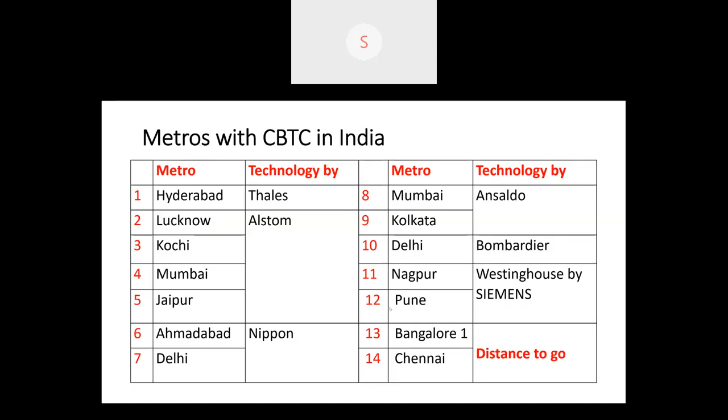What is the difference between mainline signaling and metro signaling as far as operations are concerned? Average speed on mainline is about 50 to 75 kilometers. Metro is 30 to 35. Headway is 5 to 7 minutes in the busiest routes on the main line, and in the metro it is in seconds, maybe a minute, 1.5 minutes. Interstation distances are 6 to 10 kilometers, and here it is hardly a kilometer. Braking distances are very less, about 200 to 250 meters.

Station yard layouts: for the passengers' sake, there are no yards practically, very few lines, only 2 lines normally. Only in the depots, yards are there. Signal clearance may take some time because it is done manually on main line, whereas it is a question of seconds. Then stopping time at stations is 2 to 5 minutes on main line, whereas it is in seconds in metros.

Distance between 2 trains: in absolute block system we are having about 6 to 10 kilometers. Auto signaling, it is hardly a kilometer. Whereas they can be as less as 25 to 30 meters in metros. So what made it possible in metro, the standard talks about?

We can say train controlling has 2 types. One is external to train, the other one is internal to train. External to train, we are all aware. When we start from the beginning, first the time interval system was there, and then it became space interval. Time interval was not safe because if the train ahead brakes, there can be collision. That is why we have gone for the space interval, where human agencies were responsible in the beginning for avoiding the collisions. This is how the signaling solutions we are providing.

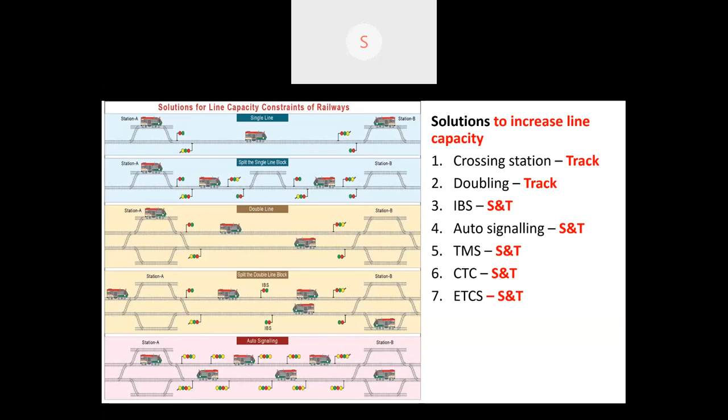This is the conventional train controlling, where a traffic controller on telephone advises the station masters which train has to be preceded or where crossing has to be arranged. This is the indirect way of controlling the train. Then came the TMS. Basically, TMS is a tool for the traffic controller. It is a real-time display of trains on a mimic diagram with train numbers displayed, so that the controller has an overall view of the situation.

The background work involved is train tracking, which requires train number entry also. If it is done, the train number is displayed. Then train charting, automatic charting, where the delayed or on-time trains are also shown. Then integration with crew, rake management and loco management software makes optimization of the resources possible.

Sir, 1 minute, sir. Actually, the slides are coming a little bit slow. So you can give a slight pause after every slide, sir. Oh. Now TMS is available with you? TMS, train management system. Yes, sir, it's visible. It's fine, working fine, sir. Okay. Next one you got? Yes, sir.

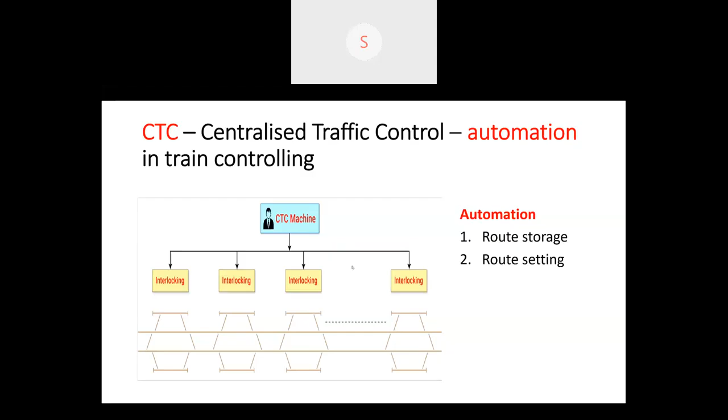That is, interlockings are controlled from the central place by the CTC machine by a central person. If we look at how the signaling systems have evolved, we can say first signals started detecting the point. So the signal engineer is exposed to the track. He is supposed to have knowledge of points and crossings. Then came the train detection with the track circuiting. So the insulation properties of the track, sleepers, that knowledge is required.

Then came the repetition of the signal aspect into the cab. So here the human element is now involved, how the driver looks at it, how he responds to it in the cab. We had a number of cases where they were even damaged in the initial stages because they thought it is not an aid, but it is snooping on their activities. Then we have controlling of brakes and then controlling of the propulsion. Propulsion means actually deceleration and acceleration, stopping and speeding of the trains. Now we are supposed to know the loco characteristics also as signal engineers.

So the same thing we can show in a different way. We can see who is our consumer. The consumer of the signal is the driver in the beginning. So track circuit, point, LC gates form a route and then a movement authority is generated and shown in the form of signal and the train driver used to consume it. Now the movement authority is consumed by the train directly. So the knowledge of the train, loco, propulsion as well as braking is a very, very important thing for signal engineers now.

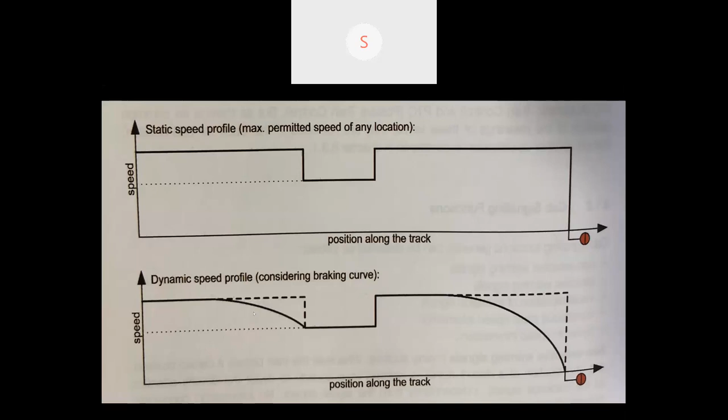Let us have a look at the speed profiles of the trains, how they are shown. In the top graph, we can see it is called the static speed profile. A speed restriction is there. And of course, as the train comes to the signal which is showing red, it is supposed to come to stop, zero. Y-axis is the speed, x-axis is the distance. Actually, here it is shown as if the train speed has to reduce from x to x minus y, as if it would happen in a sudden way. There is a braking characteristic. This is called dynamic speed profile. So the dynamic speed profile is the thing which is really important for us.

Train speed is controlled in two ways actually, or two considerations are there. It is based on severity of speed deviation. That is, at a particular location, how much more is the speed than the permitted one. That is the severity. The other one is based on the distance, how to reduce the speeds in steps. These two.

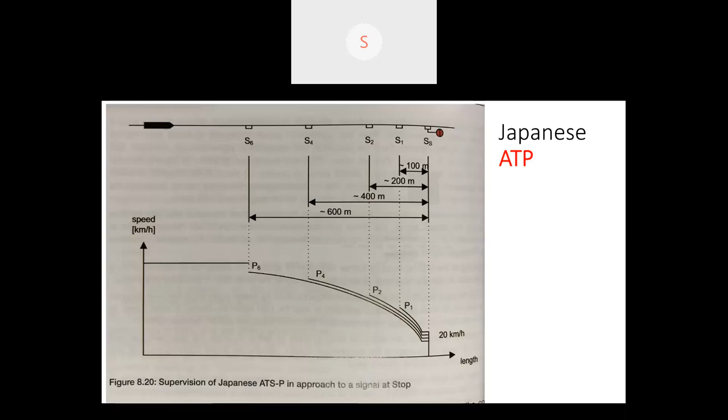So ERTMS, that is European Rail Traffic Management System. This is the one becoming the world standard and we are also adopting it in India. It has two parts, ETCS and GSM-R. ETCS is the signaling component, GSM-R is the telecom component of the ERTMS. Let us have a very brief look at it.

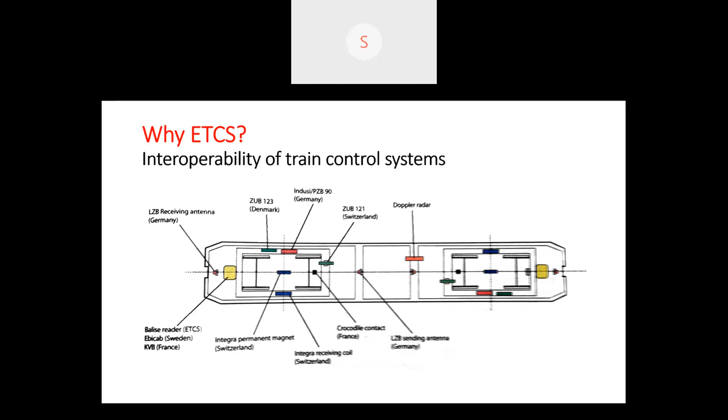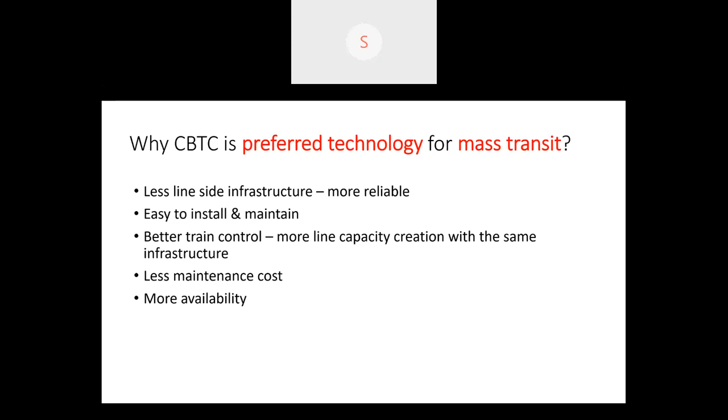Now, generally about the IEEE standard. These standards are made by the IEEE Standards Association, under the Standards Board, and all members are volunteers—they need not be members of IEEE. They follow the process approved by ANSI, the American National Standards Institute. IEEE does not evaluate, test, or verify the accuracy of the standards, and use of the IEEE standard is voluntary.

This present standard is made by the IEEE Vehicular Technology and Rail Transit Interface Standards Committee. So it is not mandatory for a product to be declared as per IEEE standard. Now, IEEE standard 1474—it is wrongly written here as 1471—has 3 parts. Part 1 covers performance and functional requirements, part 2 covers user interface, and part 3 covers recommended practices for CBTC system design and how functions are allotted to each subsystem. This presentation is about part 1, and parts 2 and 3 will be the next presentation, which may take about half an hour to 40 minutes.

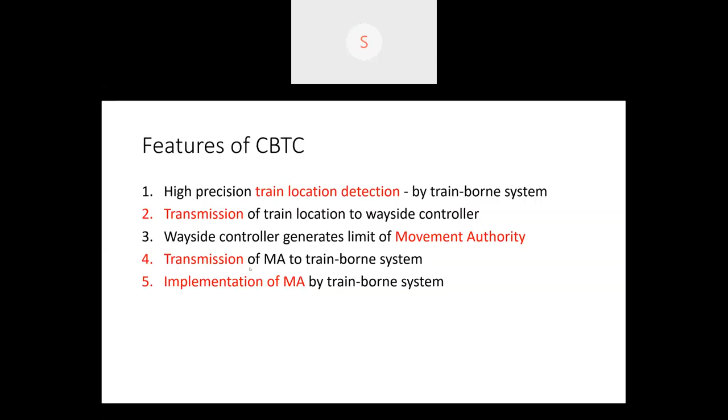Now, if you look at the functional part, we can say there are 4 subsystems typically available. One is train-borne CBTC equipment, then CBTC wayside equipment, third is automatic train supervision, and then data communication system. Auxiliary wayside system is optional.

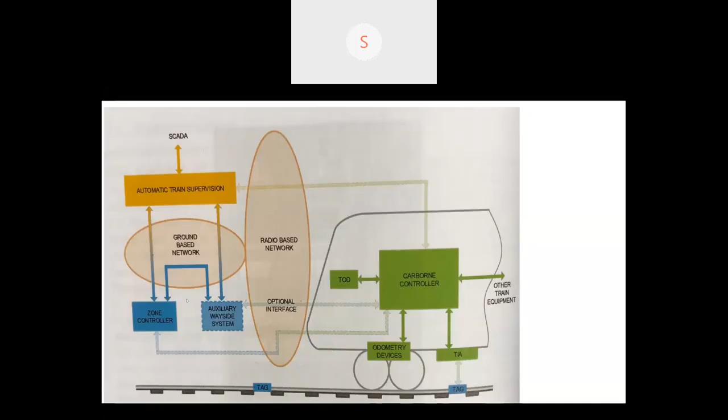Now, Nippon Signal CBTC. For about 5-6 minutes, you can have a look at how Nippon Signal has implemented CBTC in Delhi Metro. It was made for the Delhi Metro by Nippon people. It gives a fairly good idea about the subsystems and the moving block feature. This is CBTC SPARCS.

Communications-based train control. CBTC is a new train control system achieved by wireless data communication. CBTC is rapidly becoming a mainstream train control system for urban railways. By relying on wireless communications, CBTC reduces initial cost, running cost, and maintenance cost. Now Nippon Signal has created its own version of CBTC called SPARCS.

Let us now introduce the system configuration of SPARCS. SPARCS consists of 4 wayside signaling systems: SPARCS Station Computer, Station Radio Set, Wayside Radio Set, and Wayside Balise for position correction, as well as 2 onboard signaling systems: SPARCS onboard equipment and vehicle radio set.

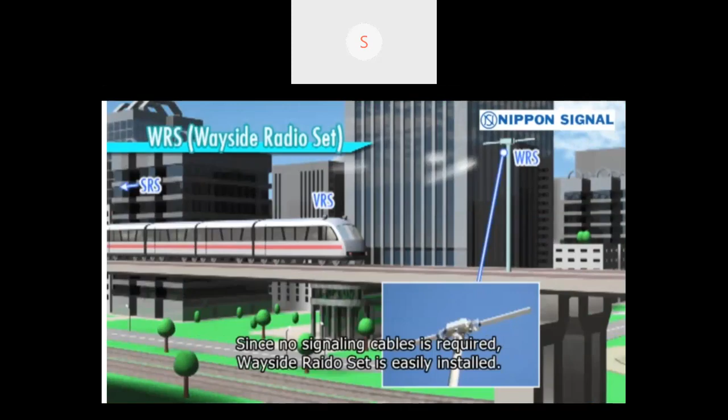Wayside radio set communicates with station radio set and vehicle radio set by radio transmission. Since no signaling cable is required, wayside radio set is easily installed. Each wayside radio set is allocated at a good distance where it can communicate with each radio set after the next.

The SPARCS onboard equipment controls automatic train protection, ATP, and automatic train operation, ATO. ATP control logic and ATO control logic are combined and integrated. Vehicle radio set is a radio device installed on top of train cars. It communicates with station radio set and wayside radio set by radio, and with the SPARCS onboard equipment, a cable is used for communication.

SPARCS employs a combination of two methods to detect train position. The first method uses balises for position correction and a tachometer generator. When it passes over the balises for position correction installed between stations, the SPARCS onboard equipment receives positioning data, and this reception triggers the tachometer generator to measure distance.

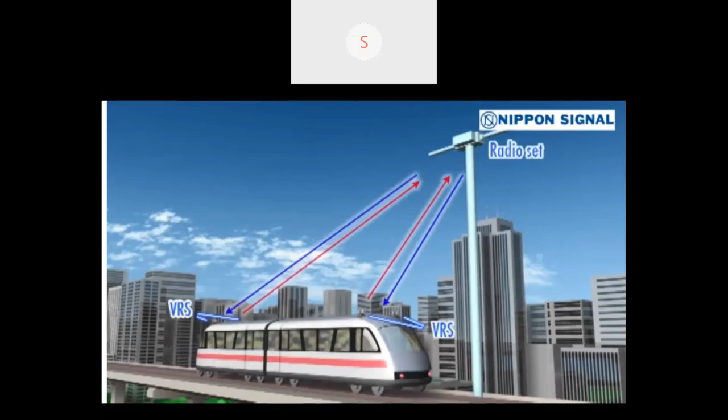The second approach is radio ranging, a unique feature of SPARCS possible only by radio transmission. Train position is detected by calculating radio transmission time between wayside radio sets and vehicle radio sets. This method instantly detects train location, even immediately after system startup.

SPARCS Station Computer compares the train location information from these two distinct sources. If they match, SPARCS confirms the train location information, providing highly reliable train location detection.

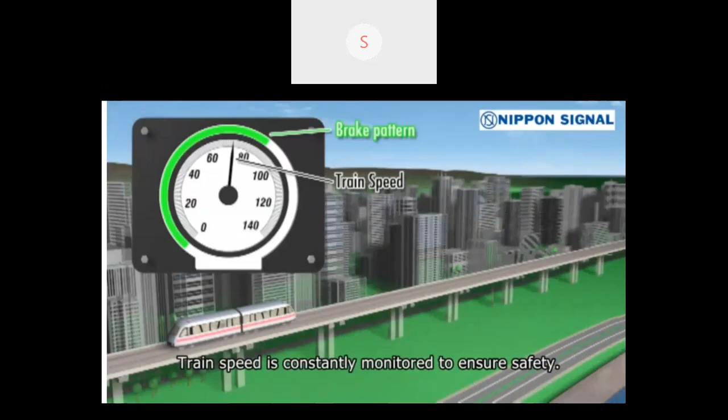We now turn to the train control method. The SPARCS onboard equipment generates a brake checking pattern to prevent collision with preceding trains. Train speed is constantly monitored to ensure safety. If train speed exceeds that of the brake checking pattern, the automatic brake is applied.

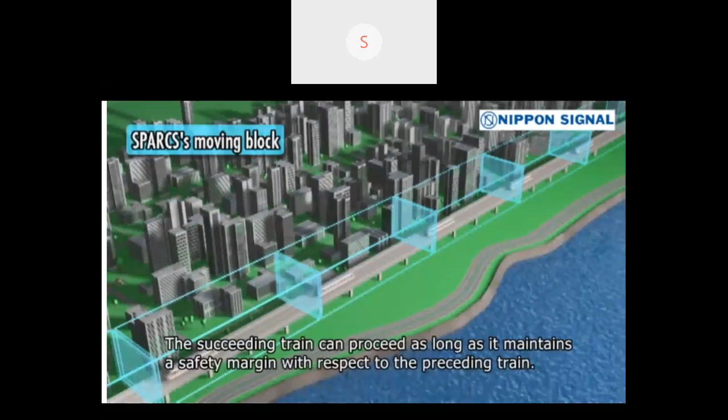SPARCS generates moving blocks. With conventional fixed blocks, succeeding trains cannot enter a fixed block ahead until preceding trains have completely departed. The moving block generated by SPARCS responds dynamically to the departure of a preceding train. The succeeding train can proceed as long as it maintains a safety margin with respect to the preceding train. In this way, SPARCS can shorten the headway of trains.

SPARCS satisfies unattended train operation GOA 4 as stipulated by the IEC International Standard. Departure and arrival of trains, control of doors, and control of platform screen doors are all controlled automatically by SPARCS.

In China, SPARCS has been in operation on Line 15 of the Beijing subway since December 31, 2011. SPARCS is also certified under SIL 4, a safety certificate under IEC.

This small video, I think, must have given you a good idea about how the CBTC works. Now let us have a look at performance and functional requirements of the specification.

The first point is the limitation of the conventional system. The resolution of train detection is limited to track circuit sections, and information provided to the train is limited - few signal aspects, a small number of speed codes through AFTCs or whatever. Enforcement of movement authority by wayside signal is intermittent. We are not talking about ETCS 3, but we are talking about conventional systems available till now.

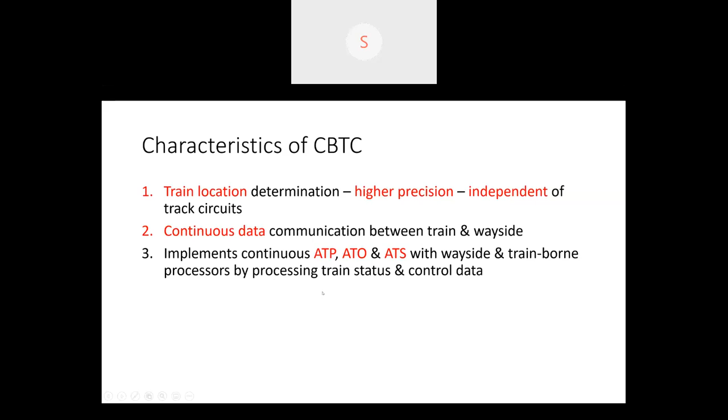Let us see what they are. So the benefits are closer headways, greater precision, continuous safe train operation, and overspeed protection. Now there are about 6 clauses in this. Out of that, we will be looking at 4, 5, 6 only. The remaining things are just casual things - general requirements, performance requirements, and functional requirements.

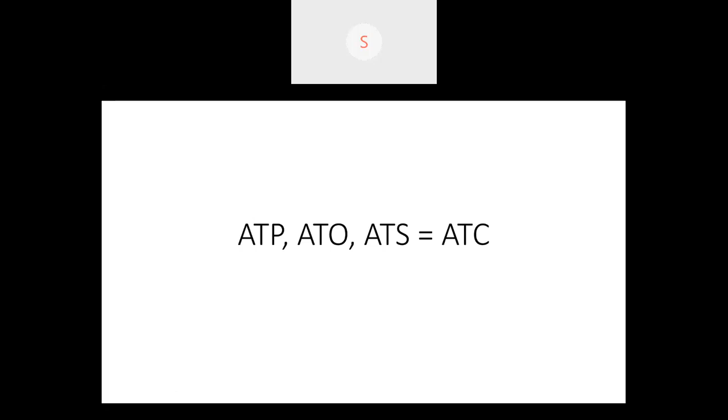Now let us understand ATP, ATO, ATS. All three put together is called ATC. Automatic train protection is a fail-safe thing. This is supposed to avoid train accidents due to collisions, overspeeding, or other hazardous conditions like over the points, and through train detection, train separation, and interlocking. These are the three things.

Automatic train operation is automatic speed regulation, automatic stopping, acceleration and deceleration, as well as train and platform door controls - the facilities available within the train for controlling those functions. Then automatic train supervision is about the monitoring and scheduling of the trains, how the trains are - that is the TMS portion of it to some extent.

Minimizing the inconvenience to the passengers or the services in case of failures - all those functions are done by the automatic train supervision. Basically, automatic train supervision and automatic train control is a combination of ATP, ATO, and ATS.

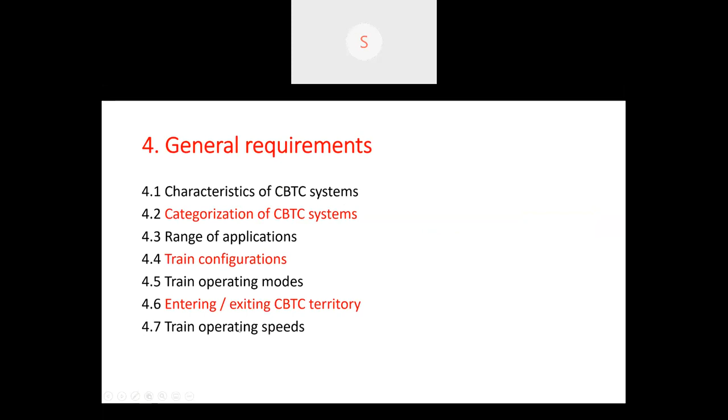Train location determination to higher precision, and bidirectional high capacity data communication between train-borne and wayside processors.

Categorization - we can say the CBTC can function only as ATP also. It can be limited to only ATP, and it can do partial jobs of ATP and ATS. And it need not be the only control system - it may be working in conjunction with other auxiliary wayside systems also.

This is what I said in the beginning, that less equipment is not happening in real time. CBTC by itself may have less equipment, but when we are depending on auxiliary wayside systems, we are providing track circuits, we are providing AFTCs and signals, and again electronic interlocking. So it is actually a double system.

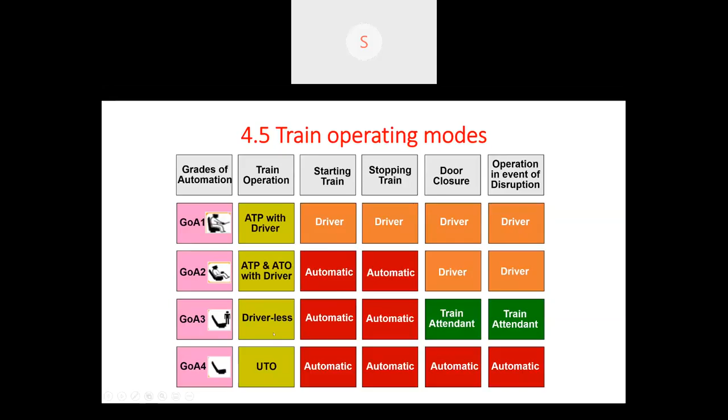So train operating modes: CBTC equipped trains, that is with full protection, and non-CBTC equipped trains, where the auxiliary wayside system protects those trains actually; CBTC won't protect. So failure mode train operation in CBTC territory, because in case of failures, how the trains have to be dealt with. So there are degraded modes. It can be achieved through functional elements of CBTC itself, which can have standbys and take care of it, or auxiliary wayside systems can do that. And a combination of both is also possible.

So the failures can be of 2 kinds. One area completely may be affected. The other one is one train in a control area can fail actually. So in these cases, protection of the auxiliary wayside system can be deployed, or operating procedures, that is the rules implementation, or a combination of both. So it is one area of control failure or one train in any area failure.

So if one train fails in an area of control, it works on the protection of the auxiliary wayside system. So train speed is limited by the propulsion system itself. That is, the train can still work many times even without the auxiliary wayside system also. It depends on the failure modes.

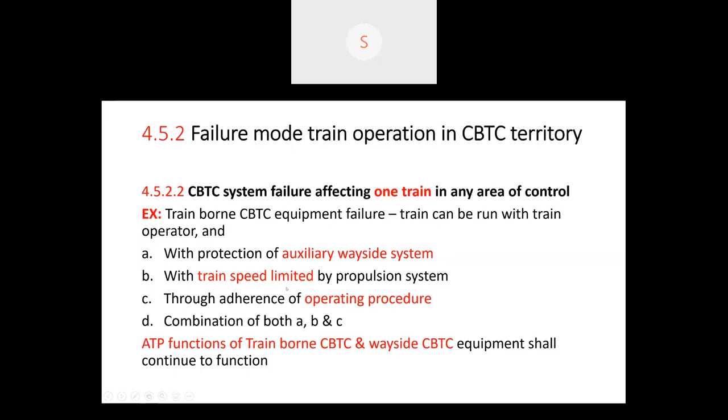So CBTC train operating modes in non-CBTC territory. So the CBTC trains can go into non-CBTC territory also. So it shall cater for transition into CBTC territory. The equipment can still do some functions like limited train speed and zero speed detection. These functions can be provided even in non-CBTC territory, because they are available in the car-borne controller.

And sometimes the standard even permits that this CBTC can be integrated with other systems, and indications can be provided separately or integrated depending on the user's requirement. So it's not interoperability directly within the CBTC system they are talking about, but the integration of CBTC with other train protection systems. So failure mode in non-CBTC territory: if the CBTC equipment fails, it doesn't have any impact on this train.

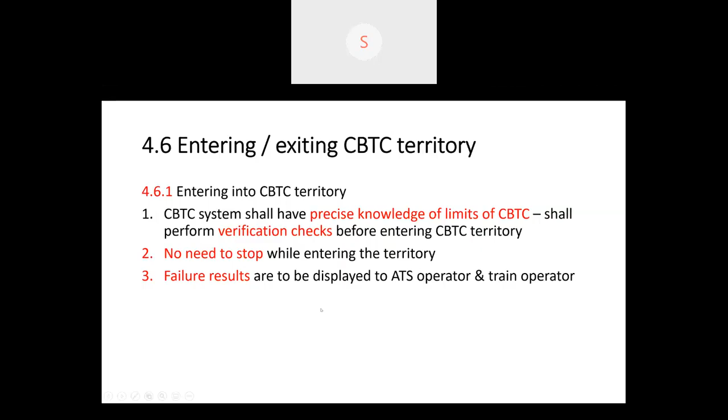When exiting also, visual indication to the train operator is given, and there is no need to stop. And if the CBTC knows the new control system, it may display those aspects also when it is exiting CBTC and entering other systems. So CBTC to non-CBTC and non-CBTC to CBTC entries are supposed to be transparent. There should not be any stoppage of the trains.

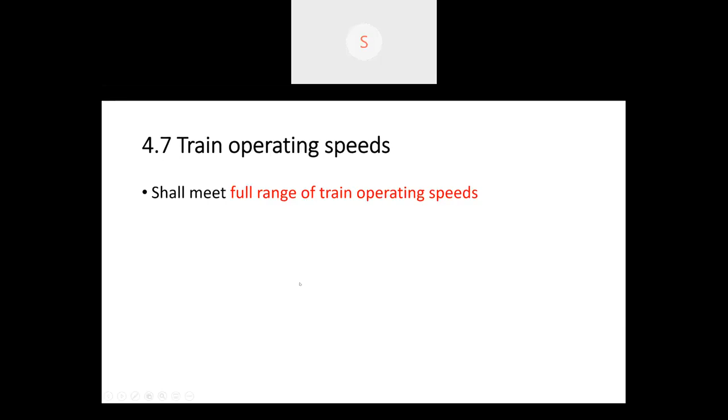Train operating speeds. Even though CBTC is provided on mass transit systems where speeds can't be more than 60-70 kilometers, the standard says that it shall cater for the full range of train operating speeds. Performance requirements.

So CBTC factors which contribute to the achievable headways and trip times. Only these two things we are going to cover. Safety requirements, system assurance requirements, environmental requirements are all typical things for any product; that's why I'm not covering these three. Safe train separation requirements and safe braking model. This is the thing which decides the headway.

Two types of headways can be given by CBTC. Uninterfered, that means trains are allowed to go at their maximum permitted speed, so naturally it gives the minimum trip time. Second one is the interfered one, that is, the train speed profile is affected by the train ahead. If the train ahead is made to go slow, this train is going to be affected if it is programmed by the operator. So it is the interfered model.

So if we want to run more services, then we push the trains one behind the other. That increases the trip time, but it increases the number of trains, most probably.

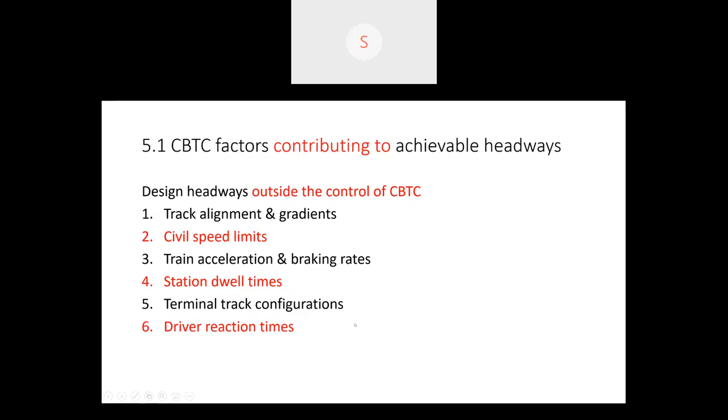So what are the CBTC factors contributing? These 6 factors shown here are outside the control of the CBTC, like track alignment and gradients, civil speeds, acceleration and braking rates, which are dependent on the engines, station dwell time, dwell time is the stop time actually, terminal track configurations, how the terminal yard is designed, and driver reaction times. These factors cannot be considered by the CBTC.

What are those factors that contribute to achievable headways? The accuracy of the end of train location, so it gives a very good resolution for the movement authority limits, thereby the trains can be taken closer, and also the frequency at which location reports and movement authorities are updated. Typically, they are given at 0.5, 0.6 seconds. Each train gives its location to the central location. So these two reduce the headways actually.

Then speed accuracy and resolution, communication delays between the wayside and the train, then CBTC equipment reaction times. These factors we will see in the next slides, how much they are. Then CBTC system performance limitations and CBTC automatic speed regulation algorithm. These are the things which contribute to better headways.

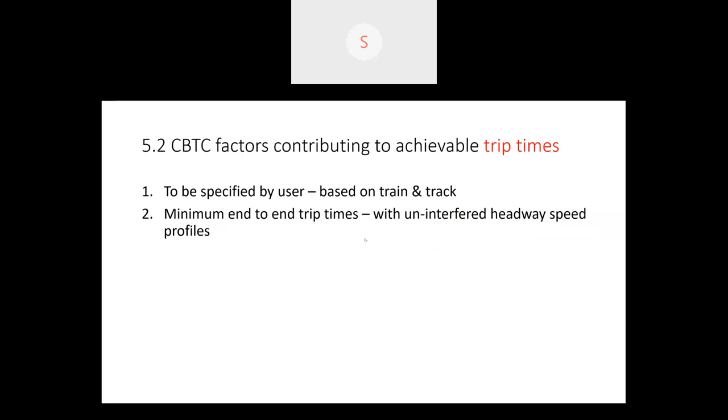So trip times, because trip times and headways are interchangeable. Here there is nothing much to discuss, because trip times are affected the same way as the headways. Safety requirements, system safety requirements: these are the things which we have covered. System assurance requirements. Environmental requirements for any modern systems are similar, so that's why I have not covered them.

And functional requirements. We said there are 3 types of functions to be done for train control: automatic train protection, operation, and supervision. And of course, interoperability and interface requirements are also there in the functional requirements. So ATP, ATO, and ATS, all 3 functions are to be provided. ATP is a fail-safe function, and it overrides the ATO and ATS.

ATO operates the functions on its own; otherwise, it is operated by the train operator. That is GOA 4 to GOA 1; it should support the complete range. ATS provides the system status information, meaning the tracking of the train, and this information is displayed in the ATS. Then it sends commands, such as where a crossing is to be arranged or not, or reduction of speeds, all those things.

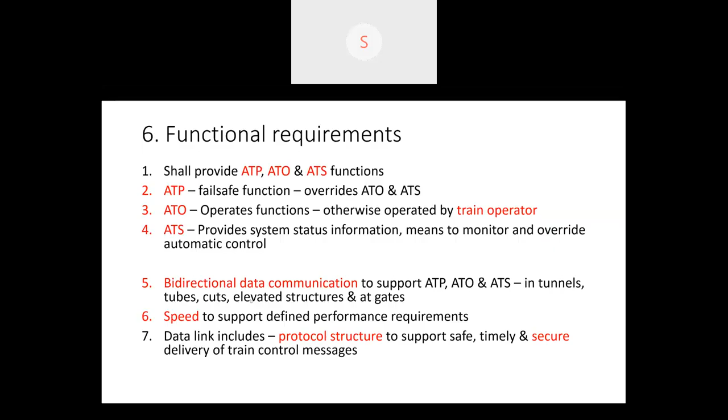Train location and speed determination. It is supposed to determine the train location, speed, and direction, at both front and rear. This is very important; it gives the integrity of the train, which is proved by both front and rear. And it shall meet the resolution and accuracy parameters provided earlier in the table. CBTC train detection shall be automatic. When a train enters the CBTC section, there shall not be any human entry for recognition of the train. It shall declare itself and get automatically integrated into the system.

For train location, it shall compensate for measurement inaccuracies like slipping of wheel, sliding of wheel, and wheel wear. Slipping happens when adhesion is less, so the wheel rotates in place without travel, which increases the odometer reading wrongly. In sliding, the wheel won't rotate; it slides during braking, which reduces the measured distance.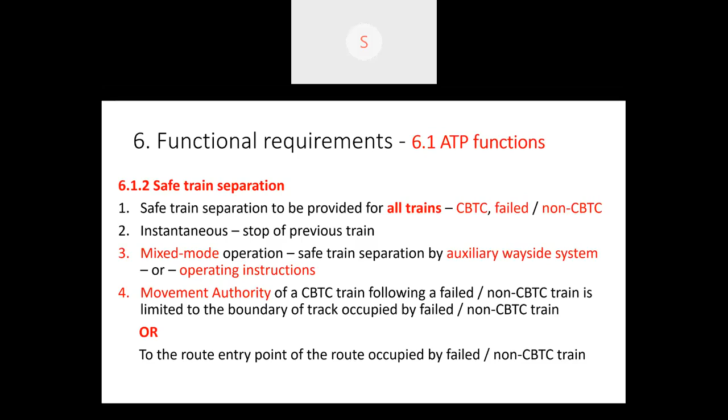So functional requirements of ATP. So safe train separation. It consists of actually how the safe train separation is provided. Calculation of an ATP profile. It is derived from fixed ATP data like permanent speed restrictions and variable ATP data. That is the temporary speed restrictions which may happen during the servicing time, and the movement authority limit also. Movement authority limit is generated by the train ahead. That is variable again. So supervision and enforcement of ATP profile also shall take place based on the above.

How is movement authority limit decided? There are a number of cases, like most restrictive of the following. Rear of the CBTC equipped train ahead. It is a normal course, it happens like that. A CBTC train is going ahead. Movement authority can go up to the rear of the CBTC, of course, taking into consideration those limitations, errors and all. Boundary of the track section occupied by a train which is having a failed CBTC or non-CBTC.

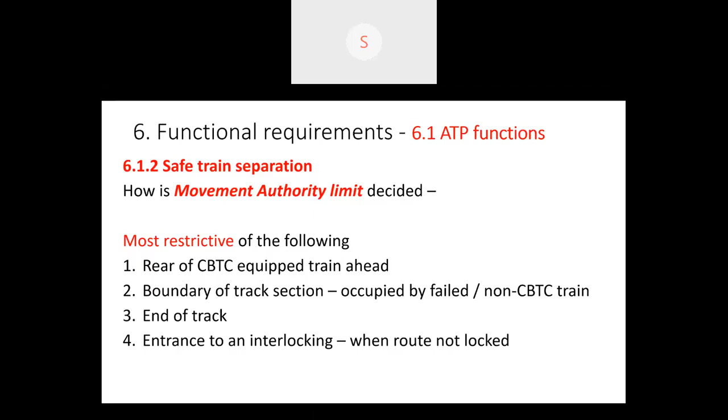Number 3, end of track at a terminal station or in a station in between also, where the platform is ending there itself. Number 4, entrance to an interlocking when route is not locked, because CBTC system can do all the interlocking functions by itself also, but there can be cases where conventional interlocking, electronic interlocking, is used and it is interfaced with the CBTC. In such cases, CBTC can give up to the entrance to an interlocking when route is not locked by the electronic interlock. Boundary of a track section with opposite traffic direction established.

Here the isolation is not like in conventional railway systems. So the trains can come in opposite direction up to the safety limits. So if a particular track is designated to receive a train in the opposite direction, still to the adjacent track circuit we can send the train from the opposite direction. Then boundary of the blocked track. Then entrance to a route when the route is not safe, like it is not locked, let us say, and point failed. In case of level crossing, when the warning devices are not functioning, then up to that boundary of the gate.

CBTC shall also provide abnormal movements like coupling, uncoupling, closing up of the trains. It shall be possible. And it shall also be possible to bypass safe train separation when the train is driven manually for failure recovery. In case of a failure, again, it shall not create a deadlock. It shall be possible to bypass this. And like putting back the signal to danger, facility to pull back the movement authority also shall be available.

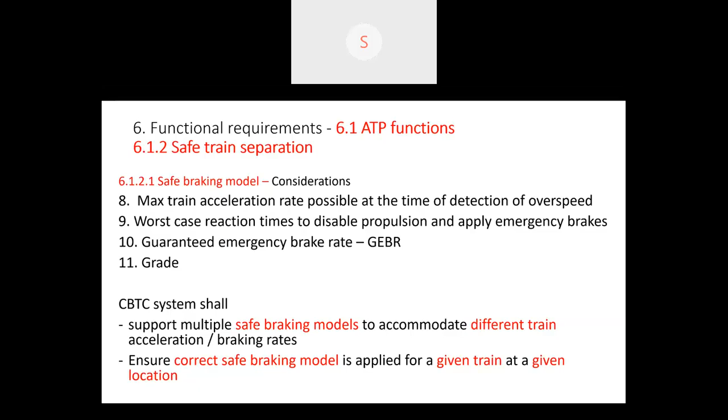So the CBTC system, as per the standard, shall support multiple safe braking models to accommodate different train acceleration and braking rates. So it is not limited to metro trains; it can have goods trains and express trains also, and normal metro trains. It also shall ensure the correct safe braking model is applied for a particular type or class of service and at a given location. So this matching also has to be done. For a goods train on a down gradient, when the adhesion is less while raining, the model has to be selected based on that. The standard says that it has to be selected like that.

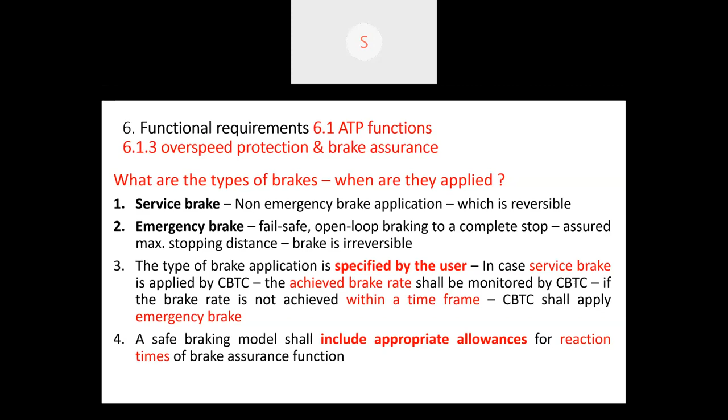So for rollback protection, there are three steps. The actual train travel direction is compared with the travel direction of the movement authority, and the travel of the train in the opposite direction, how much. These are the three factors. So we have seen 0.5 to 2 meters it can go. If it tries to go beyond that, then the emergency brakes are applied. End of track protection, in case buffer stops are there, is a part of overspeed protection. So this is about the parted consist protection and coupling and uncoupling of the trains.

A train can be formed by coupling together two or more vehicles, and it can detect the parting also. When both trains are coupled, it shall treat both of them as a single entity, and the new length of the train shall be updated to the ATS user. Sometimes the user can specify that in case train length is missed, a fixed length can be taken, say 686 meters or 500 meters as the length of the train. That also can be given.

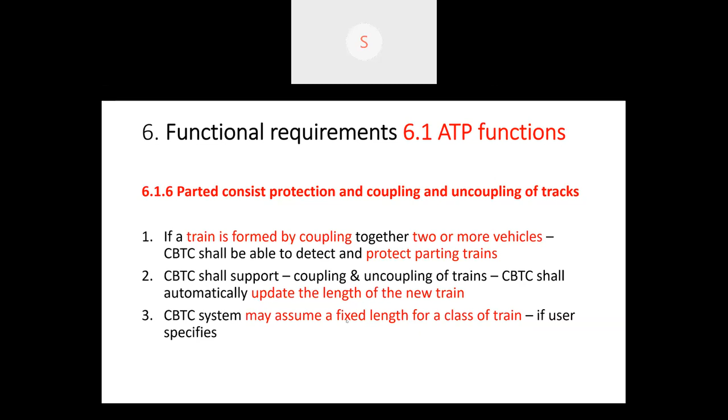Now zero speed detection. If the train travels less than 1 to 3 kilometers per hour for 2 seconds, it is treated as a zero speed detection. Then ATP functions coming to door opening and control protections.

Trains are operated with crew and without crew. Without crew, door opening and control is mandatory. With crew, it depends, as the user specifies whether it requires manual or automatic operation. The train should be properly aligned at a stopping point, there should be a platform on the proposed opening side, and zero speed should be detected. These are the conditions, and the train is constrained against motion, with selective door opening. That is, if the train length is more than the length of the platform, only the portion of the train which has access to the platform shall be opened. And a local bypass facility is provided in case of failure.

Departure interlocks are mandatory for trains without crew. A stationary train shall not start moving unless all doors are closed. And of course, manual bypass is there.

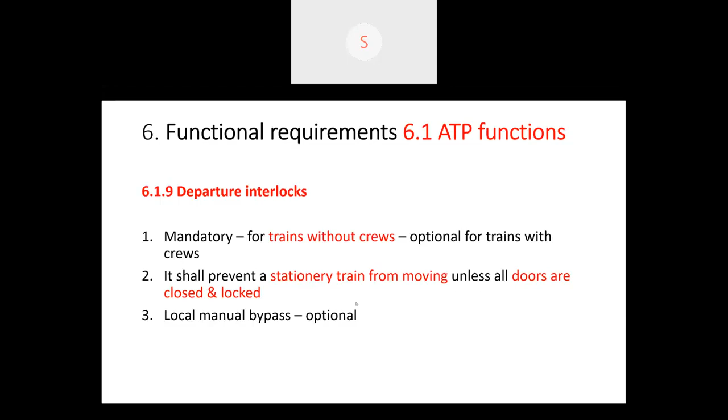Emergency braking can be reset also. But after the reset, if the train speed exceeds again, then automatically the emergency brake is applied again. This is what the standard says.

Route interlocking - the CBTC system does exactly what conventional interlocking does. It can operate the points, set the routes, and perform the complete functions of conventional interlocking. It can also interface with a separate interlocking system as well.

CBTC train location failures. Route locking shall remain in effect until the train is proved clear of CBTC subsequently. That means if a CBTC train has lost its location, until the train is detected outside, the route is kept locked. And if the secondary system detects it, then that can be made use of.

Responses to point failures, such as loss of switch indication - naturally, CBTC applies a pullback to the movement authority or authorities that were issued earlier.

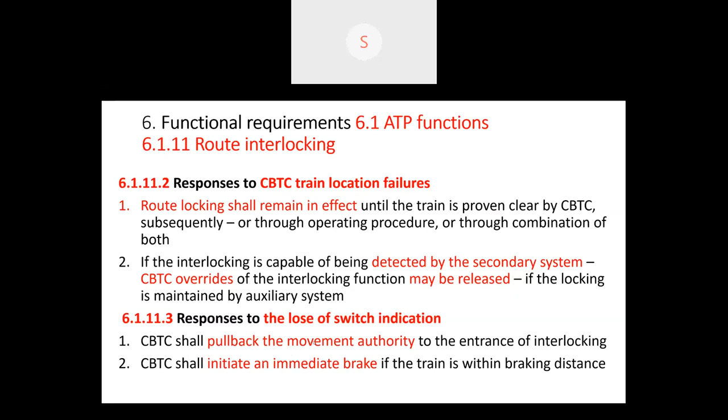Traffic direction reversal interlocks. Normally, whenever a reversal is given, all the safety conditions have to be checked when reversing a train, a CBTC train, so there shall not be any opposite train. It's the same route locking sort of conditions that conventional interlocking gives, all those conditions are proved here.

Similarly, work zone protection also applies. Then similarly, broken rail detection - actually CBTC doesn't concern itself with broken rails. An auxiliary system is provided, and that auxiliary system can be integrated with CBTC.

Level crossing protection also - for example, if a train stops just before the level crossing gate because of a station, then only after the train starts moving should advance indications, approach indications, and warnings be given. These are all typical signaling principles only.

ATO functions - automatic train operations handle starting, stopping, and speed regulation. This depends on passenger comfort levels, because acceleration, deceleration, and jerk rates are all very important, so the user specifies all those things. And all this should happen within the ATP over-speed limits, so ATO cannot override ATP.

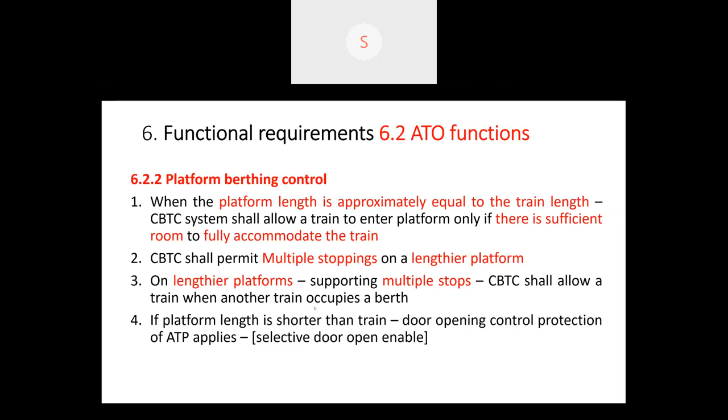Door control can be limited to automatic door opening, door closing, or both, or it can be completely given to the control of the driver.

The train doors and platform edge doors are both interlocked. Unless they match together with a particular precision of deviation, the train doors shall not be opened unless the platform edge doors are exactly to the same measurement.

What we are talking about is practically the interlocking of the train by the CBTC basically.

ATS is actually the train management system, and it is optional. There need not be a separate ATS, since ATS is benefited by three characteristics as we have seen earlier: precision of location, bidirectional data communication, and data processing.

If the ATS features of CBTC and ATS features of a separate ATS can be integrated, the standard permits that. So ATS user interface, I think we will be looking at in the next part also.

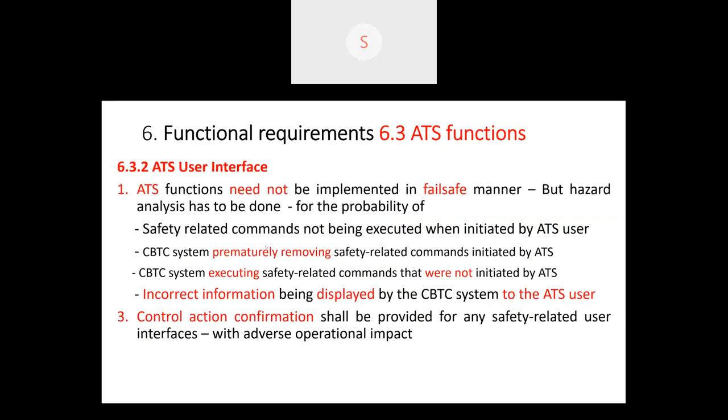Each CBTC equipped train shall be assigned a train identification. It is a very important thing. It shall automatically track, maintain the records, and display on the ATS software. ATS actually gets all the train related information.

Train routing is the main function of the ATS. It can be done manually or automatically - automatically done for CBTC trains. For other, non-CBTC trains, it is not possible.

Automatic train regulation means scheduling and headway regulation. These are the two options.

Automatic dispatch function for the train identity, schedule, and actual headways between the trains are to be seen, along with service strategies. Regulation is done by increasing train stopping time at stations, and running time between the two stations is controlled. Instead of sending the train at maximum speed, it is controlled.

In case of manual driving, the driver is given the profile by the ATS. ATS says, yes, you drive to this particular profile. ATS sometimes may also advise the ATP to take a particular speed profile, like a wet rail condition.

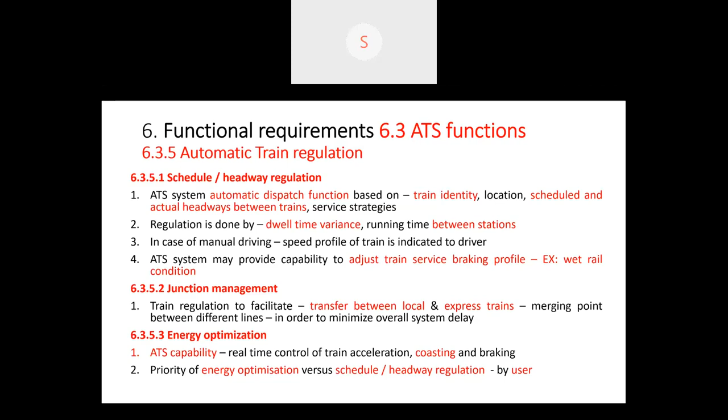Energy optimization is another portion of it. So, functional requirements of ATS functions further.

Station stop functions are four actually: station stop at next station it can display, hold train at the next station, skip the next station, or door control and inhibit. These are all parts of the station stop functions of ATS.

Restricting train operations is also part of the ATS, but they can be hazardous. They have to be considered in the hazard, like stopping the train in between two stations, temporary speed restriction, and blocking of the switch on the track. This is done at ATS.

They have safety implications, work zones like this. Of course, fault reporting also - there are two types of faults, critical and non-critical, and all critical ones are to be acknowledged. The fault reporting is also done by the train. There is an extensive fault reporting system.

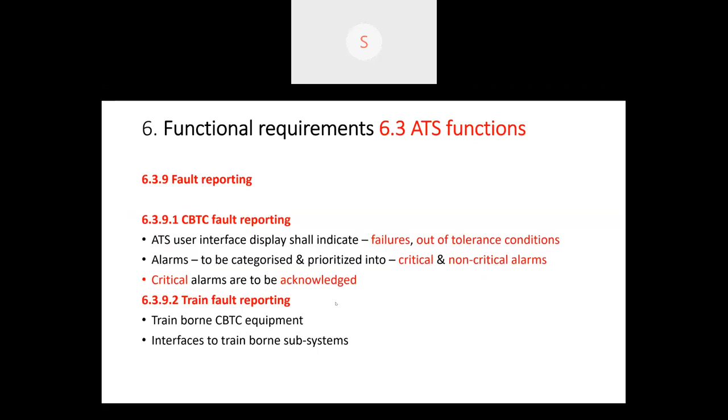Interoperability is not part of this spec. Why has this happened? Because basically the standard is prepared somewhere in 2000.

Before that, 20 years before, CBTC was existing for about 20 years. So it is not possible to bring everything into the interoperability box. That's why they have left it out.

It's not like ETCS, where standards are formed and then people started working and developing products on that. So that is the disadvantage of CBTC - interoperability problems.

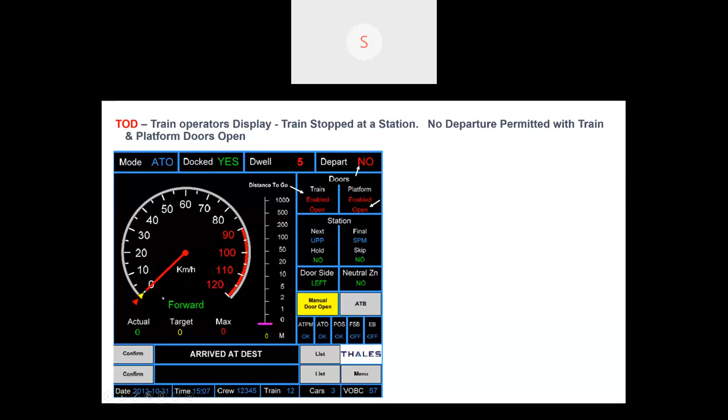What are the mandatory displays? The standard says train operating mode is required, CBTC operational status is required, the current CBTC-determined speed is required, and maximum authorized speed, and overspeed condition alarm, if anything. These are the mandatory requirements.

Optional are so many, like train type, station related, fixed territory type, then train run identity, train location, track designation, train length, reason for movement authority limit - why, let us say work is in progress ahead, that can be informed to the driver. Then target speed, speed profile when approaching the movement authority limit, so distance to an approaching limit. So these are all the things.

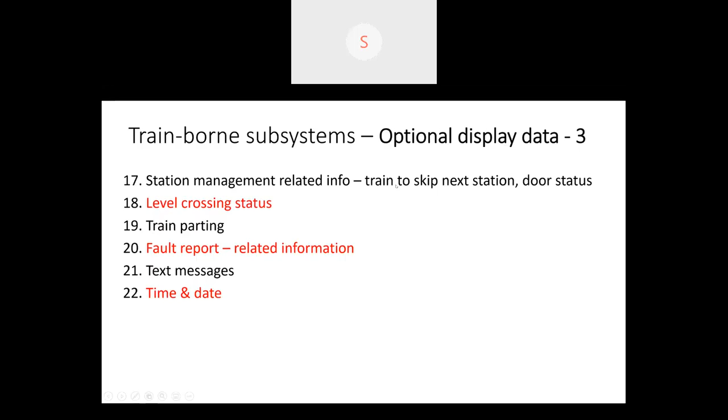Train routing through interlockings, required brake rate to an approaching limit - these are all actually optional displays. So many things: level crossing status, fault report if anything is there, any textual messages that can be sent from ATS, and time and date, like a train to skip the next station or door status.

Now, inputs to be given from the train-borne subsystems. These inputs are given most probably by the train operator. Operating mode selection, overspeed alarm condition acknowledgement, user login parameters - these are all, first two are mandatory. Next things are optional: train length, train type, crew identification.

Audible alarms - mandatory. Overspeed condition is mandatory. Optional are penalty overspeed condition, transitions into and out of CBTC territory. Then detecting a parting - still it is optional only. Approaching work zone, train length conflicting, manually entered and detected are not same.

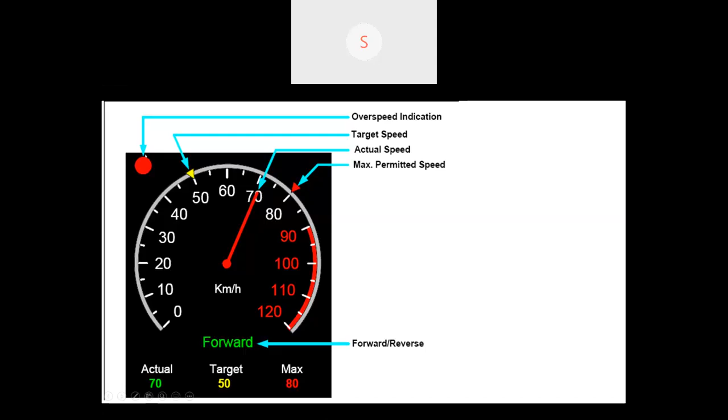Now here, no, next one we'll see. You can see here, actual speed is 70. Target speed is 50 only, this yellow triangle. Maximum speed permitted is 80, this red triangle. Because the train has crossed the target speed, that overspeed indication has appeared. So these are the type of indications.

So there is a lot of information displayed to the driver, and it depends on the optional - many things are optional depending on the OEMs who develop and give it, and then most probably the users. So this is the information message or fault messages like speed warnings and overspeeds - those things can come here.

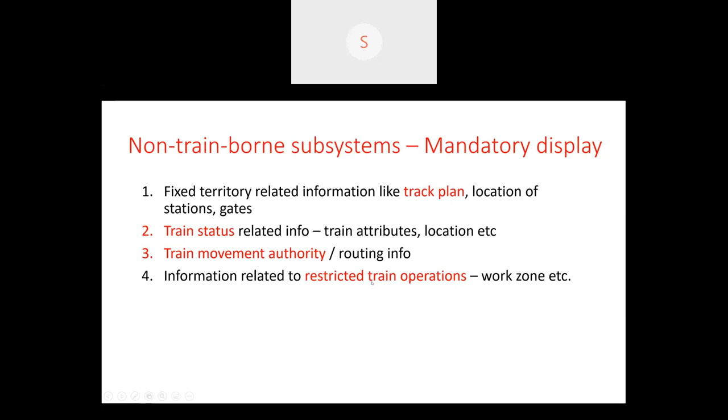Non-train borne subsystems, as I have told, are at the ATS station. So normally it is like our panel - VDU, fixed territory related information like track plan, location of stations, gates, train status, train movement authority limits, that is our route locking, information related to restricted train operations like work zone - they can appear on the panel itself. Optional are a number of things like train status, fixed alignment related information like permanent SRs. These are all the things.

What are the inputs to be given? Inputs to request and cancel routes, that is cancellations, actual movement authority limits and all those. Unless the input is given by the user, limit of movement authority cannot be set. So inputs to establish and remove the work zones are to be inputted here. It is like panel operation basically. Some of them are optional actually.

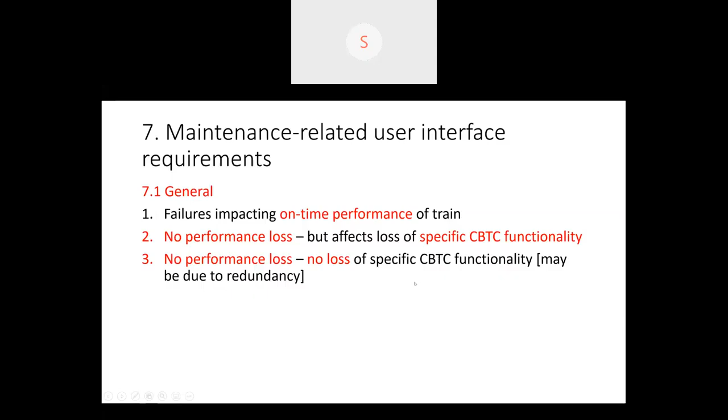Maintenance related user interfaces. Failures can be of three types, he says: on-time performance affecting the train; no performance loss but some specific CBTC functionality has gone; no performance loss and no loss of specific CBTC functionality also - maybe when there is a standby system available, everything is working all right, but the standby system has failed. So the three varieties.

User interface requirement: displaying of the data that is maintenance related, the graphical representation of the CBTC system configuration, completely. And listing of the current status of subsystems, whether communication failures or hardware failures, anything graphically.

Then timestamping of the failure alarms, failure logs, and giving the physical location of the failed CBTC subsystems. Here the biggest issue is there are a number of locations where these equipments are distributed. Then early warning failures, the predictive type of alarms. That is the end of that portion.

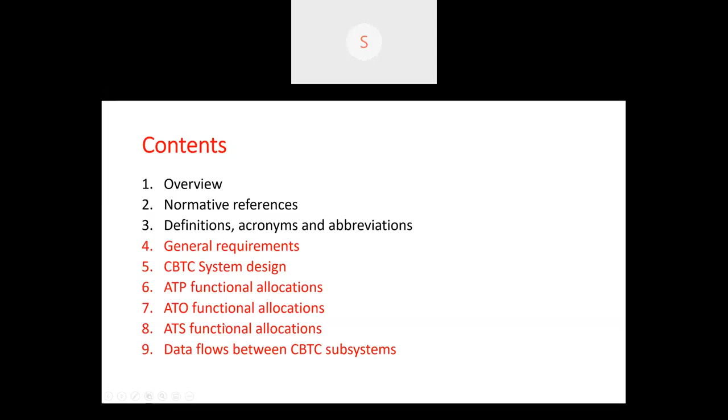Now comes the recommended practice for CBTC system design and functional allocations. So this is a very normal general thing. In this again, the first three are very normal routine things. So we'll be covering each ATP, ATO, ATS functionalities, how data flows, typically, not completely, fully.

So we have said there are only 4 subsystems basically. ATS equipment in the central place, train management system, it is a software. Wayside equipment, it is like electronic interlocking which can make use of precision of the train location, and train-borne equipment which is available in the train, which implements the movement authority limits and automatically controls the train.

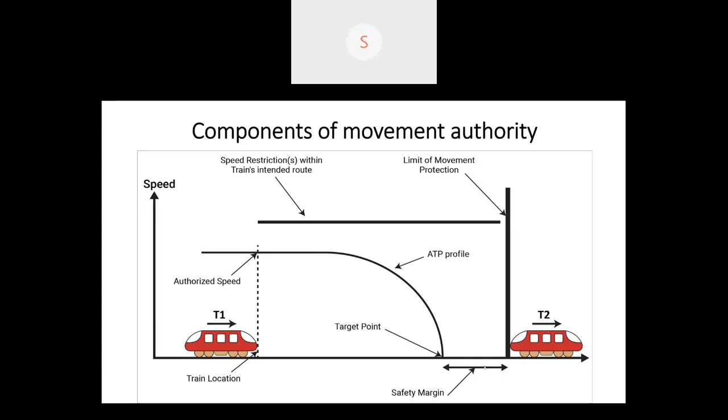So, ATS equipment can be there at central location and wayside also. Central location is, as we have seen, the TMS equipment, and wayside is the local panel. Identifying, tracking, and displaying of trains, providing manual and auto route setting capabilities, regulating train movements to maintain operating schedules.

Wayside equipment, we have seen already, we have covered it a number of times. Similarly, train-borne equipment, what it is supposed to do. Then data communication equipment, it is located at central, wayside, and onboard also. And it is treated as non-vital communication actually.

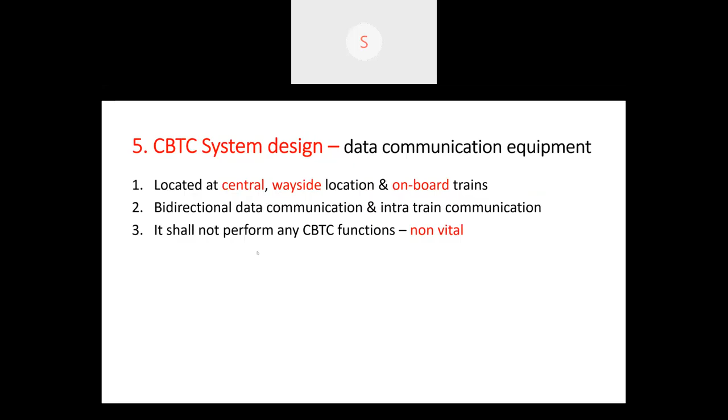Now, principles of operation. This is exactly what we have discussed till now. High resolution train location by train-borne systems, communication of the train location and other train status data to wayside equipment, movement authority determination, all what we have covered till now. It is again repeated in this standard here in this portion because this is to be implemented.

So, braking system, service and emergency brakes, propulsion system, both subsystems, PIS, passenger information systems, fault reporting subsystems, other train-borne systems. These are all the parts of train subsystems.

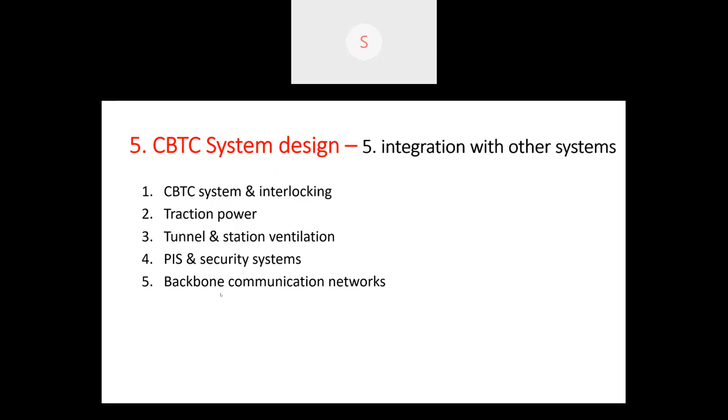Integration with other systems: CBTC system and interlocking, traction power, tunnel and station ventilation, passenger information system and security systems, backbone communication networks. Now, there are 12 primary functions for ATP functional allocations. They are train location determination, limit of safe route determination, like this, these 12.

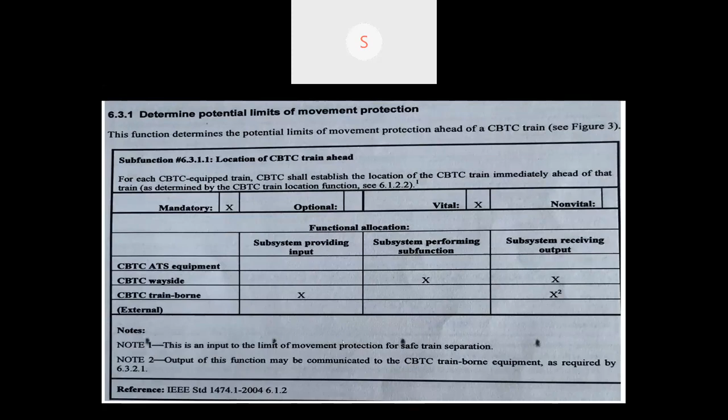So the explanation is given here wherever the clarifications are required. So like this, primary ATP functions, what we have seen, all the 12 are given here and how they are related. So see each one up to 12. This is for train location determination, how they get related to each other. Each clause, subclause is given to have the clarification. This as a sample I am showing because this is beyond the scope of the presentation. So different types, like supervise, enforce authorized speed and travel directions.

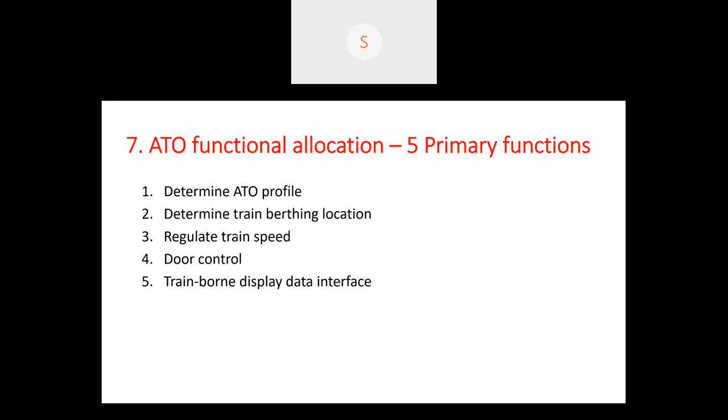Similarly, for ATO function allocation also: determining the ATO profile, determining the train berthing location, regulate the train speed, door control, train-borne display data interface. These are the 5 primary functions for automatic train operation. And how they are related, what functions determine the train's ATO profile. The subfunction is described here. This is optional and it is non-vital, because ATO profile is not a safety function.

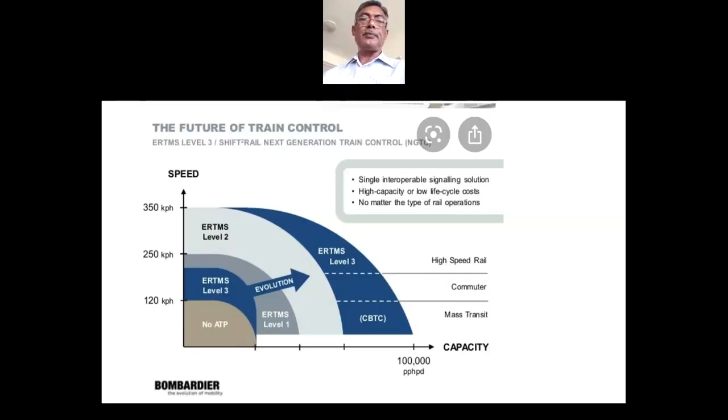In that they were proposing to use open Wi-Fi frequencies of 2.4 gigahertz or 5.8 gigahertz for the Wi-Fi backbone. But I want to just listen whether we should go for that open channel or we should subscribe a paid channel from DOT. Really, actually, as I have seen in some of those books, today even LTE is being used. LTE also is being used for the CBTC purpose.

It has not given the examples. The book I have, the railway signalling and interlocking international compendium I have shown, in that it is given that even LTE is being used. Most of the places it is Wi-Fi actually, 802.11. That's what is being used.

Kashinath here. Yeah, please. I just want to tell you that this usage of free band may be okay in the underground metros because you don't have any chance of interference with any other user who may also be using the free band. But in elevated metros, and most of the metros now are going to be elevated, it is better that, as Shyamal said, we should take

Maybe. Yes, definitely. I heard there was some problem of interference in Cochin Metro. If anybody is there from Cochin Metro in this discussion, he can highlight. Actually, Lucknow and Kochi must be with the same system of Alstom. Lucknow said there is not a problem, and even Hyderabad Metro is using the same, Thales. They also announced it, but definitely, yes.

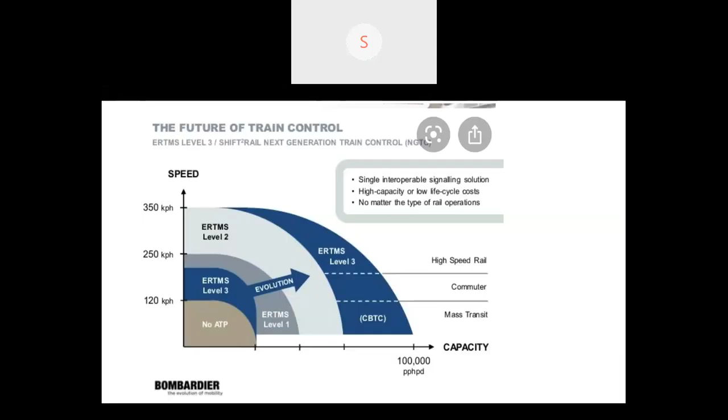Yeah. Now, like MMRC, they have line 7, I think they have gone for CBTC. All others are conventional systems. If they want to convert the conventional system to CBTC, it won't be interoperable unless you go for the same. People are talking about today and the future. Actually, the future is a CBTC and ETCS combination. If it happens, we have to see, until such time, next generation train control.

One question is, if electronic interlocking is already there, is it possible to implement CBTC? Of course, it is a hypothetical question. On the mainline, I don't think it is possible to go for CBTC, but theoretically it is possible. The local zone controller can exchange information with the electronic interlocking, and in the block section we can have zone controllers controlling the trains. Theoretically, it is possible. There is no problem. That is the answer.

Kabiridi. Yes. I think in the specification itself, there are 3 types of implementation. In the first type of implementation, they are assuming the interlocking can be separate from the CBTC, where CBI, I think they are calling it, is incorporated in the overall ATP. Yeah, it is there.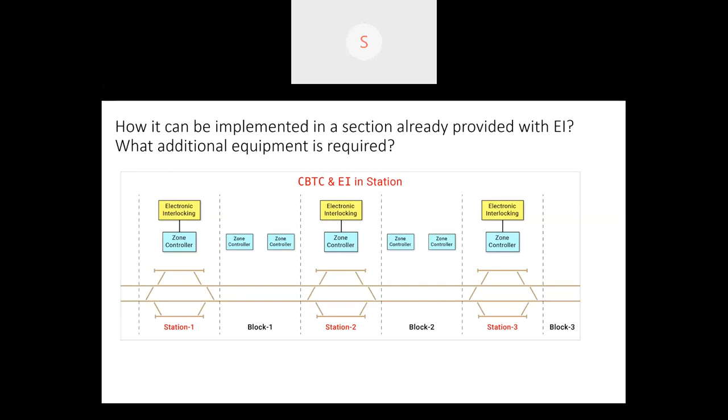How much improvement in headways is theoretically achievable with CBTC? How is headway calculation done in CBTC? Simulation studies done in IR for any section? Simulation studies have not been done, and the achievability of the headways and all these things is a system design really. It is a greenfield sort of a thing.

If somebody asks, yes, I want to have a metro at so-and-so station with 7 stops or 20 stops in a distance of 10 kilometers, and I want to run with a headway of 60 seconds, like that it comes out, CBTC. Now the CBTC design starts. How many zonal controllers are required? And like that, it starts.

It is not really that headway calculation is done like that. And these are all the algorithms actually, which are available with the OEMs. So we can't really make any comment on that.

Number two, how is security of data transmission ensured? Okay, the presentations I have seen for Hyderabad or Lucknow say encrypted data. It is a very simple sentence, but how safe it is, really we don't know. I can't comment on that actually. Yeah, this we have discussed, being ISM band, susceptibility of data. Yes, it is there. Data transmission is part of the ATP, and ATP has to be SIL4.

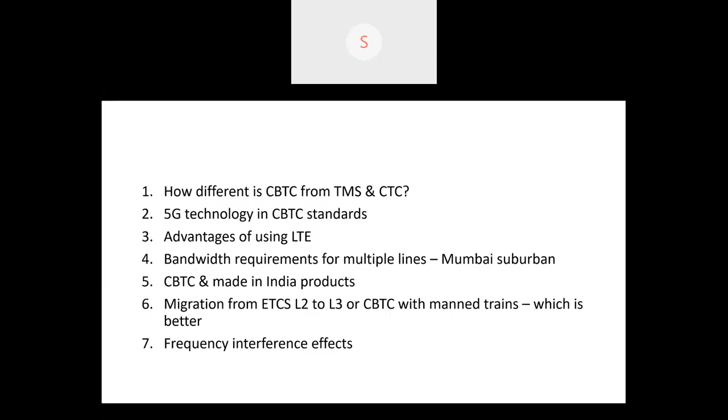Frequency interference. Yeah, this question, how will CBTC be integrated with Locotrol? Locotrol of GE, I think. Actually, CBTC and Locotrol do the same function, like fuel consumption saving or other things. So only one can remain in the loco, both cannot. CBTC or Locotrol, only one. Maximum speed is not very high in India. Why should we? Can't we integrate Locotrol in the ATS?

In the ATS portion of CBTC, I think Locotrol can be incorporated. Basically, ATS has what we call a low energy consumption mode, and CBTC's ATS has this too. Locotrol's purpose is also the same. While coasting, power is reduced automatically. The purpose is the same for both CBTC's ATS and Locotrol.

So both cannot do that. Locotrol is being used only on the main line, not on the metro anywhere. Locotrol and CBTC are used in two different places: Locotrol on the main line, CBTC on suburban. It is not required in the CBTC area at all.

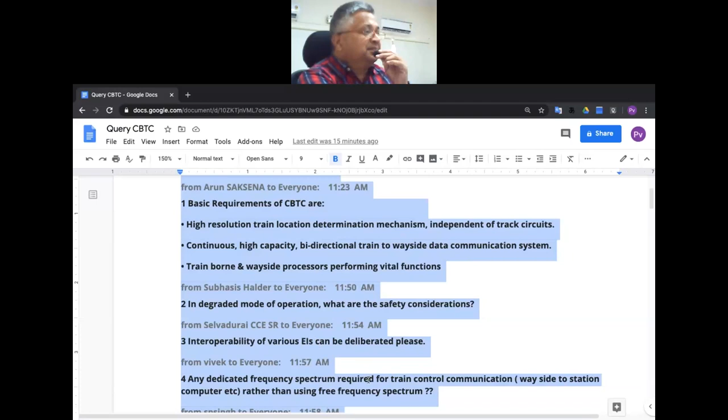Yeah, it is statement. Second one, sir - degraded mode of operation. What are the safety considerations? I have shown one screen, I think.

In the degraded mode of operation, the train location is lost basically. So the train location is treated as the occupied portion of the full track section.

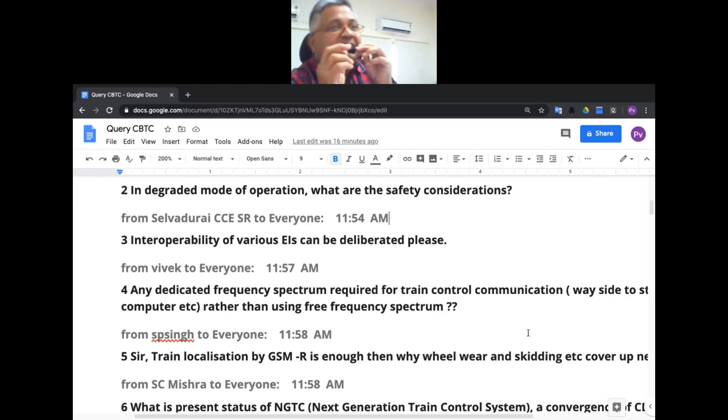Hello. In case we are using, let us say... Sir, you have to unmute your mic. So kindly you have to unmute your mic. Yeah, sorry, I'm sorry. No sir, actually we muted all because some noise was coming.

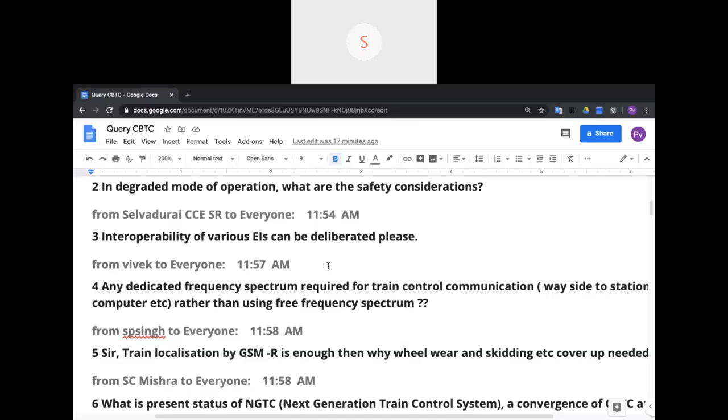In degraded mode of operation, what are the safety considerations? Basically in the degraded mode, the train detection, let us say train location detection, if it is lost, then the auxiliary train detection system of axle counter or AFTC, if it is used, the safety is ensured in such a way that the movement authority limit will be to the border of the track section. That's the main safety consideration. Rather than if CBTC were working, this limit could have gone up to the train actually. Instead, it stops at the auxiliary train detection system limits. That is it.

Interoperability of various EIs can be deliberated - this is a big challenge. Arun Saksena sir should tell really. This is becoming a big challenge for ETCS2 also. There is work going on for the EULYNX, which is called making the entire thing standard for all interlocking and the interfacing standardized. That's how many years it will take, but that is the problem and that is the challenge. Yes sir, that is a big issue, really.

Next one - any dedicated frequency spectrum required for train control communication, wayside to station computer rather than using free spectrum? Yeah, it can be used actually. Like as I was telling, LTE is being used. I don't know if LTE they might be using for backbone or for moving train. 5G should be a good option really, because its area of control gets limited, and that should offer a very good alternative. I don't know, Mishra ji or anybody can throw some light on this.

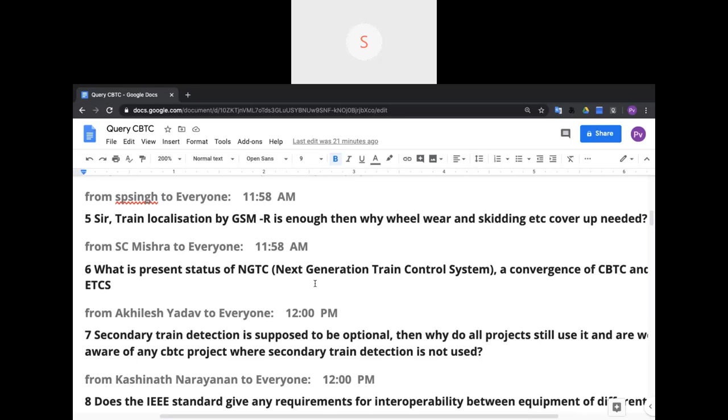CBTC is not, I think, relying on GSMR anywhere. Mainly the location correction is through the fixed balises and incremental through the tachometer. In fact, as a secondary thing, they were using some laser sources as odometer and even accelerometer, everything. It can be RFID, something like that - similar, yes, to exactly pinpoint the location and correct the locations.

No, I think conventionally railways are not experimenting much with communication technologies. I think we are the one - Indian Railways - this TCAS is a very good example of making use of simple technologies.

Next one - what is the present status of NGTC? Secondary train detection is supposed to be optional. Then why do all projects still use it, and are we aware of any CBTC project where secondary train detection is not used?

That's actually why 'less equipment' is not the right statement for the advantage of CBTC. Because once we say mass transit, we expect availability up to 99.99999%. So we can't depend on just CBTC alone for localization or train detection. That is why even at degraded operation we will be able to do some services. That is why I think Hyderabad is having this secondary detection system.

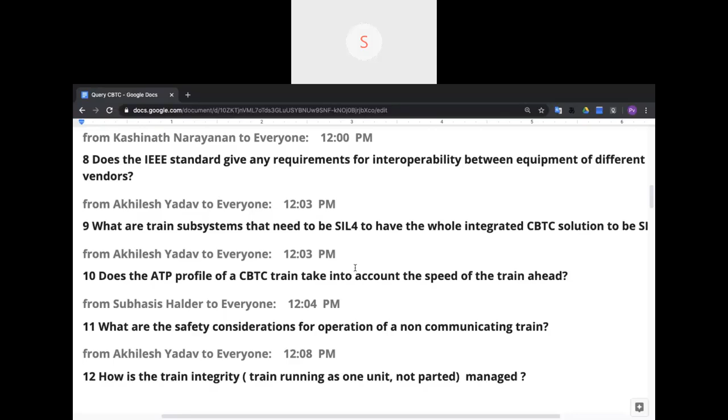Does the ATP profile of a CBTC train take into account the speed of the train ahead? I don't think so, it can't. It need not take that into account because that is again a hypothetical thing. No, it is not part of it.

What are the safety considerations for operation of a non-communicating train? For a non-communicating train, what they try to do is that particular section is treated as occupied, and on the track section where the secondary detection system is provided, trains are not allowed onto that section, and the train is treated like our piloting system, brought to the station, like the piloting systems. Exactly.

Puneet, can you give some details on the failure of the trains, ATP in particular train? Puneet is the head of signaling in Hyderabad Metro. Yeah, okay.

Good morning sirs. So actually, regarding this, there are also doubts because we have discussed about this wayside secondary detection system, it's an optional system. If this is an optional system, then it was mentioned that either the secondary detection system or manual SOPs can take care of non-communicating trains. So we have to think of this. Also it was discussed that in Mumbai they have taken away the signals, but still have the track circuits for secondary detection. So I think track circuits will still be required in case we have to deal with a failed CBTC train. That is the minimum requirement.

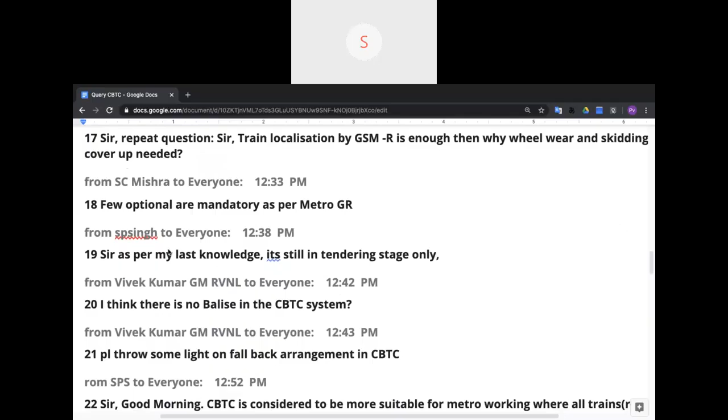Train localization by GSM-R is enough. Then why is wheel wear and skidding cover-up needed? That we discussed, I think. Few optionals are mandatory as per Metro GR.

Mishra ji, what is this? Few optional. I raised it while you segregated two requirements, mandatory and optional, as per IEEE requirement. But our GR, in fact, puts some more restrictions. For example, ATP failure: they have not defined exactly what ATP failure is. So if distance to go is not available, it is taken as ATP failure. So there are some mandatory requirements as per our Indian Railway GR which are not covered in IEEE. That's what I indicated.

As per my last knowledge, it's still in the technology tendering stage only. Which one? 19. We don't know which place it is. Mr. SP Singh.

I think there is no balise in the CBTC system. Yeah, there is no balise, but a different type of fixed things are used, which give the 900 megahertz or whatever. Those are coils, basically different. It need not be Eurobalises, but fixed location things are available. Item number 21. Throw some light on fallback arrangement in CBTC. I think we have discussed sufficiently.

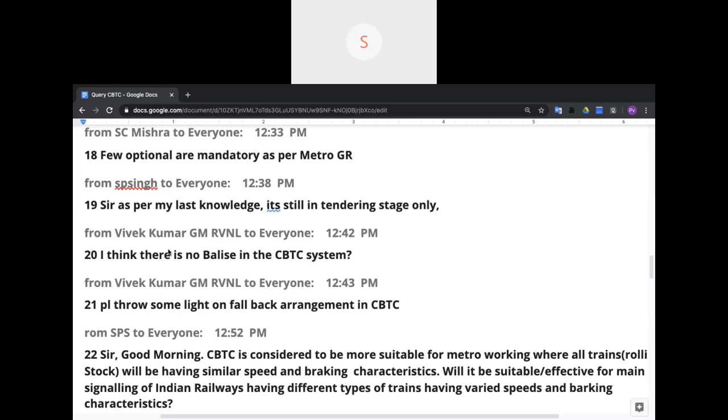Yeah. I think Venkatramana, anything more there? Oh, that. Can this system be used on the main line? Has it been commissioned anywhere? I don't think so. Mainline nowhere. CBTC has been approved for implementation on the... Okay, yes, sir. That you have told.

Cab to cab train communication has also been used as an... I don't know, sir. Really, cab to cab communication is also not there. A CC won't communicate with another CC. It is a train line which was mentioned by Puneet Arora. Yes, sir. Failed train. Cab to cab communication is part of implementation type 3, which is called the train centric implementation. Okay. I think Alstom already has a model based on that.

And 26: in MTR, there was a case of side collision in a CBTC section, which occurred while testing the emergency brake console. Yeah, this occurred in Hong Kong, while switching over from one line to the other, out of the two computers, one computer. It is maybe similar to our CKP division accident, main and standby switching over.